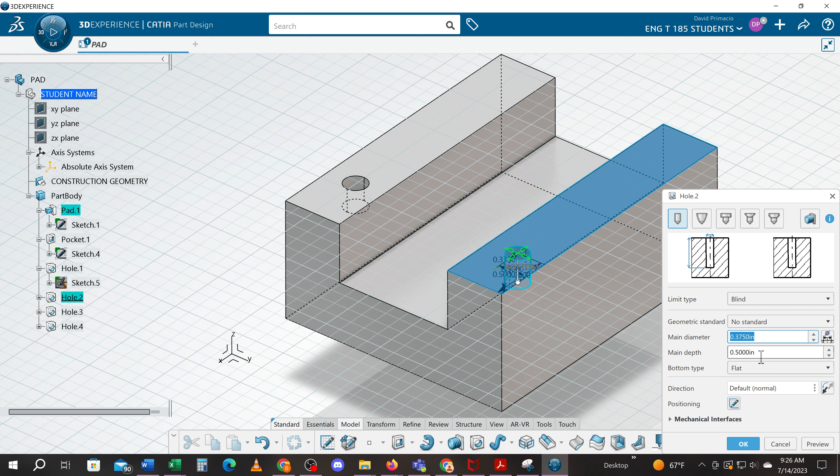Challenge yourself to see if you can modify this hole to match the dimensions of hole number 2. Do you recall what I said to do to change an existing part without having to delete it and start over?

Try this on your own. You can pause the video. If you can't figure it out, then continue to hit play and you'll see how it's done.

So to change hole number 1, I simply double click it. I don't have to recreate it. I just change those values.

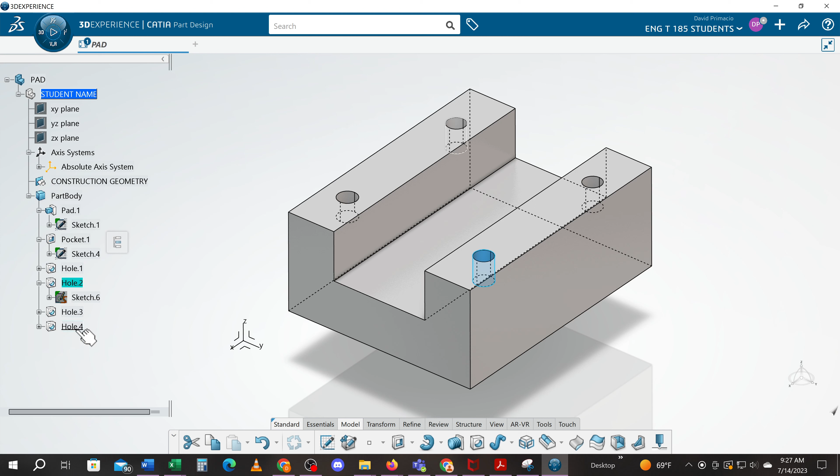So I'm going to delete holes 2 through 4 and show you how I created them. I'm highlighting them using the shift or control button and I hit delete on my keyboard and select OK, and it will remove those holes.

This hole was the incorrect size. I double click it. Anytime you want to change anything in Catia, simply double click it, and you can change the diameter to 3 divided by 8, which is 3/8.

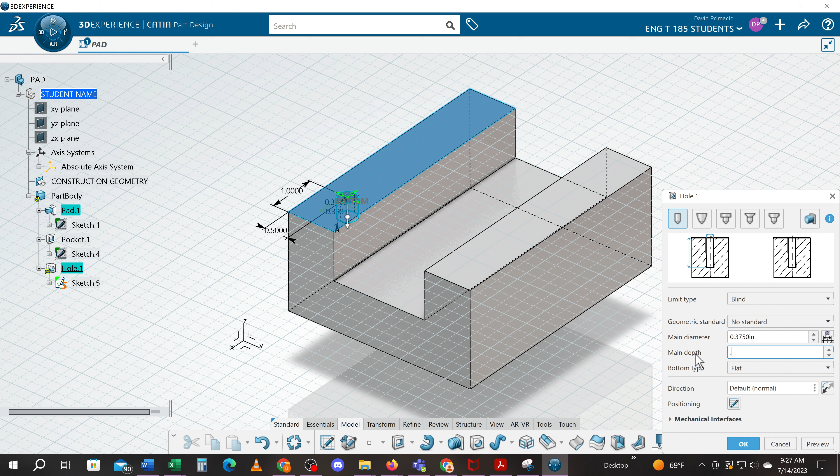If I hit tab, it will show me the 0.375 value. It will convert it to decimals for me. On the depth, I want that to go a 1/2 inch deep, and I hit tab and select OK, and I've now successfully modified the hole size and depth.

To add the next hole, you simply select hole, and remember, grab the edges you want to measure from. So I'm going to grab this edge and slightly rotate that, zoom in and get closer to this part. I don't want to grab that line by mistake.

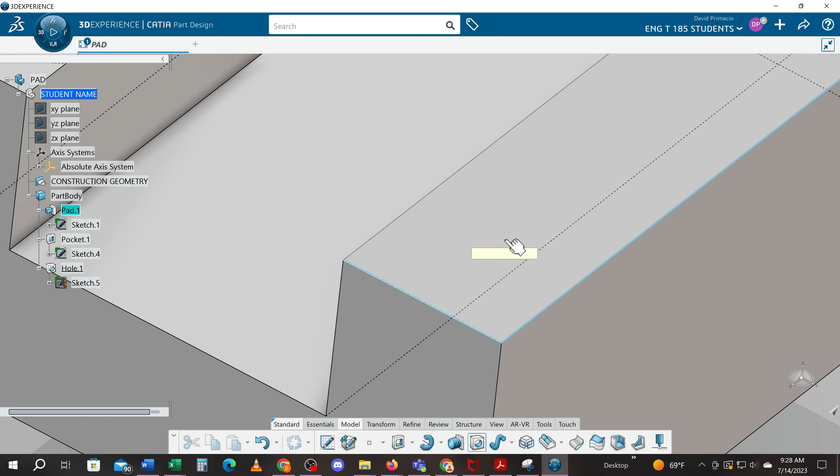I want to make sure I grab this edge, and then I'm going to make sure I grab somewhere on that face. I'm just kind of guessing where the middle was, about 1 inch over. This is 3/4 of an inch.

If I double click that 3/4 of an inch, I can change that to 1 inch in the pop-up window. And 0.503 - oh, I was within engineering tolerance already. I'll double click that though and make it a nice perfect 0.50, and select OK.

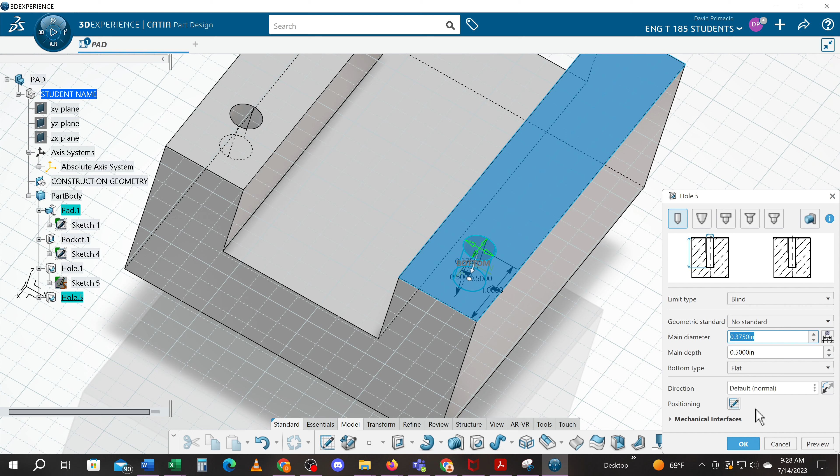And it creates the hole. It remembers the last parameters I used, so when I double click this, I can verify that it's 3/8 and a 1/2 inch deep. So from here on out, all holes will be 3/8 and a 1/2 inch deep.

I will again demonstrate this one more time under holes. You simply grab an edge and another edge, and then pick this face. Double click this and change this to 1 inch. I like to move this out a little bit.

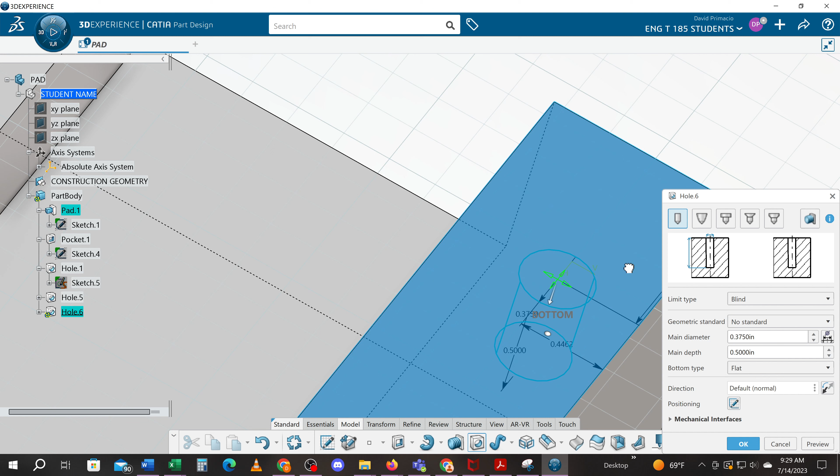Double click this. Sometimes you have to zoom in real close so you can see what you're doing. I'm going to grab that dimension and move it out here so I can actually work with it.

I'll double click this and change it to 0.5, and select OK. Alright, and that creates that last hole.

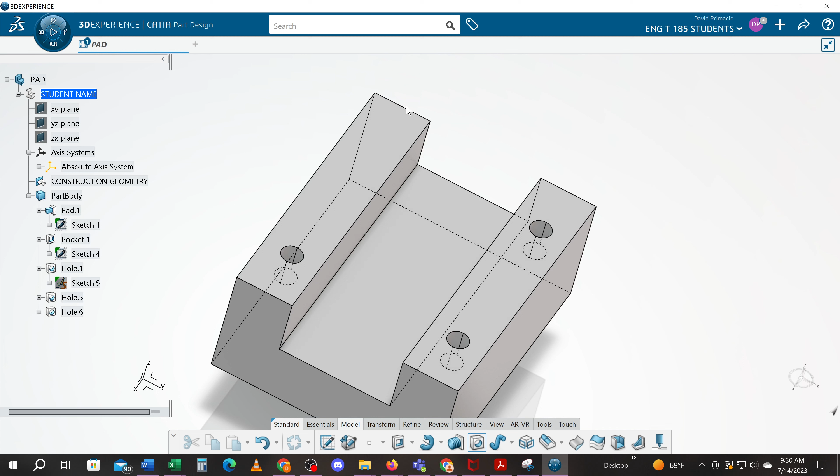Well, you know what, I said I'd demo it one more time, but we'll do it one last time. I'll show you how I did the final hole. I'll select the hole, select this edge, select that face, select this one here.

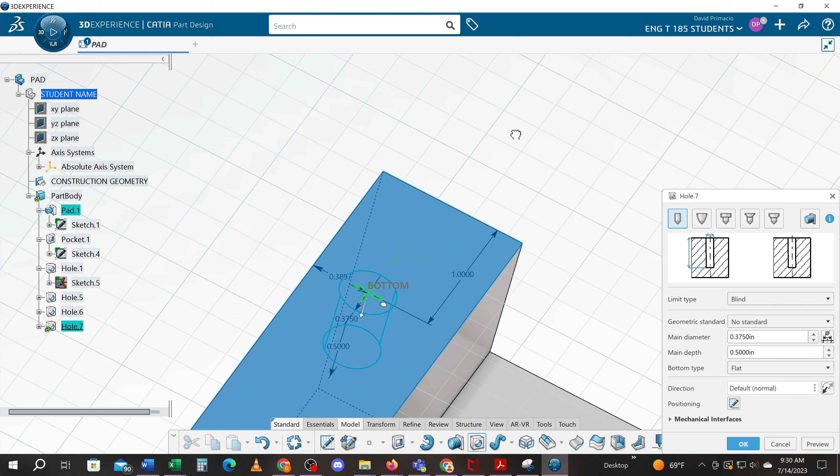Change this to 1 inch. Okay, and then again, it does not hurt to zoom up so you can actually see what you're doing. I'll move this dimension off this part so I can make sure I don't click on anything else. I'll double click that and change it to a 1/2 inch.

Notice again the diameter and depth are already set. I select OK. I'm going to use my view tab to do an ISO view to reclock it, and then hit fit all in, and that is how this part should look at this point.

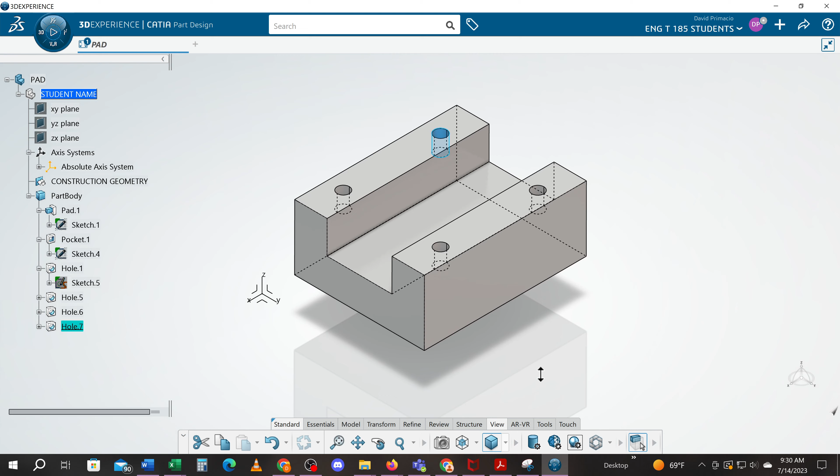Remember, I would save the part along the way, so you can hit your save command. Just simply hit save and it saves by default to whatever collaboration you currently have active. That way you can always come back to this point if you need to. All right, that concludes how to create holes.